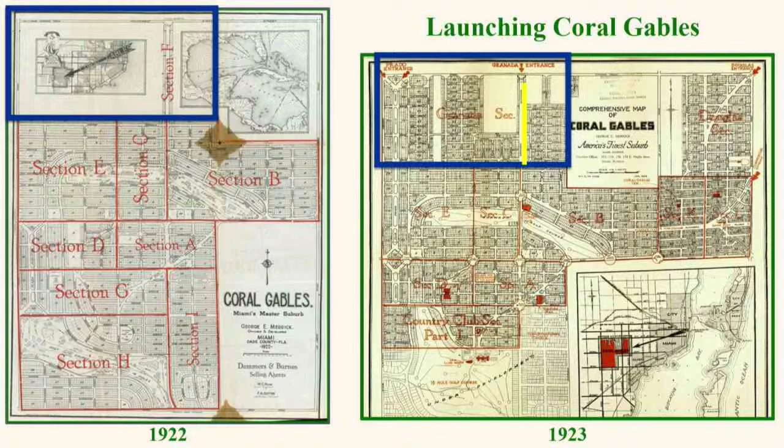In November 1923, Merrick launched the Granada section, publishing numerous ads and articles stating his intention for the area, like the one illustrated here. In accordance with the Garden City precepts that guided Merrick's development of Coral Gables, the new Granada section was intentionally platted with smaller lots on some streets for modest homes.

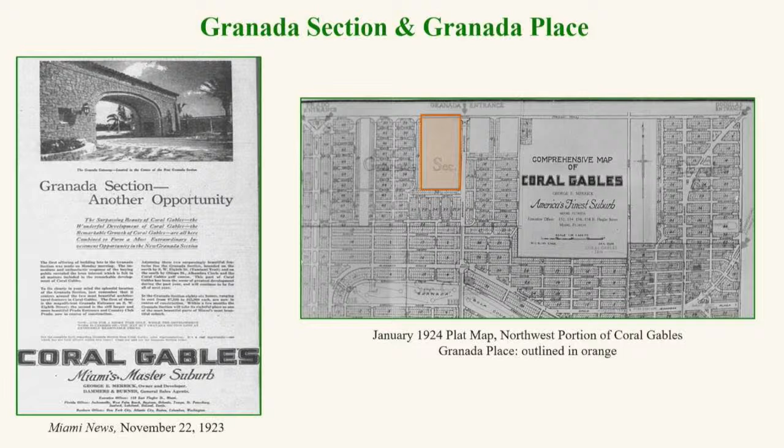Granada Place, seen here outlined in orange, was one of these sections. Merrick's plan for the smaller homes was that they were to be built with the same high-quality construction and Mediterranean Revival-style features as other structures that shaped the new city in the early 1920s.

Merrick platted the first section of Granada Place in January 1925. In the early 1920s, Merrick's team handled most of the building in Coral Gables. By the mid-1920s, the community's rapid expansion outpaced the capacity of Merrick's team, and they began recruiting leading architects, builders, and investors from across the country.

Permit documents indicate that Indiana-based teams were predominantly responsible for the early development of Granada Place. The building of homes, both large and modest, throughout the Granada section area happened at a rapid pace during the mid-1920s.

The Granada Place section followed this trend with construction of 17 homes on this small plat over a few months. Due to the 1926 hurricane and the economy, there was no further building in this area for almost two decades. The post-war homes that followed national trends were a distinct departure from the ornamented and picturesque Mediterranean Revival style that had dominated the city's landscape in the 1920s.

1116 Alberca Street retains its historic integrity and stands amongst these newer homes as a testament to Merrick's vision for a Mediterranean-inspired planned community.

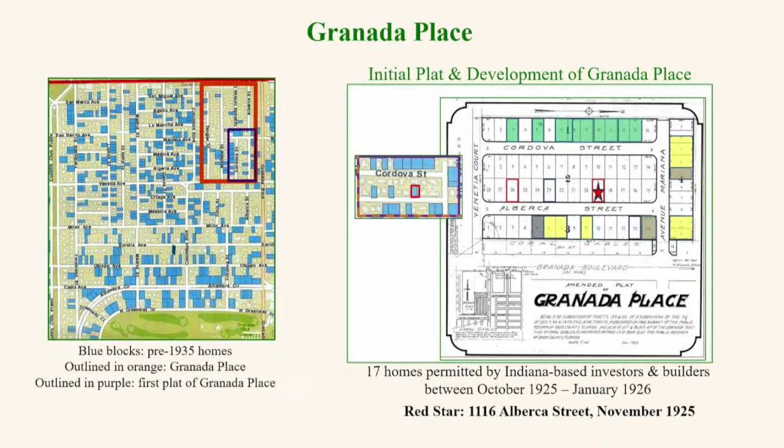What has become known as the Coral Gables Cottage started with Merrick's commissions in the Granada section to design finely detailed Mediterranean Revival-style homes on these smaller lots, to demonstrate that the moderately priced homes in Coral Gables would have the same quality of construction and aesthetic as the larger homes. 1116 Alberca Street is an example of one of these moderately priced homes.

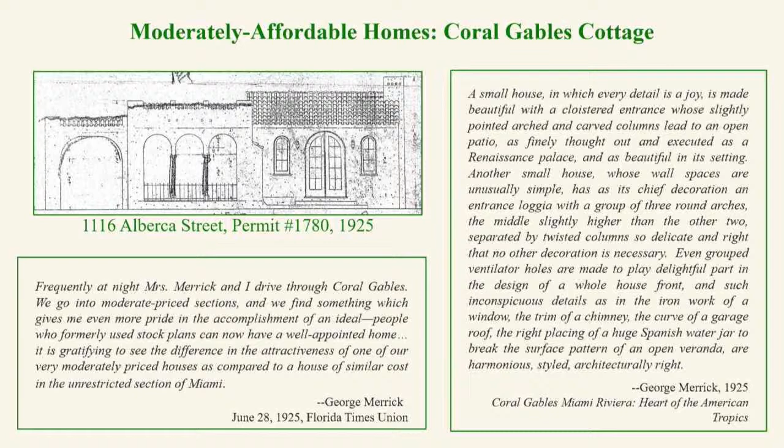The one-story, single-family residence at 1116 Alberca Street is designed in the Mediterranean Revival style. Some of its character-defining features include the textured stucco finish, a combination of roof types with pitched gable roof clad in barrel tile, and flat roof parapets with barrel tile copings. There is a front projecting and recessed bays of varying heights.

Across the facade is a series of arched openings. It also has a visually dominant chimney, and round vents are used as decorative accents on all facades. There is a porte-cochere, and the windows, originally casements, are recessed with projecting sills.

The residence at 1116 Alberca Street has had no additions. It retains its original massing and style. Primary alterations involve enclosing the front and rear screened porches for living space, and the change of window and door types. The original windows were casements. The current windows are fixed awning and casement in type.

The awning windows were installed in 1982, and most of the fixed and casement windows in 2019. The front facade has 3 distinct protruding, receding bays: the front entry, the original front porch, and the porte cochere. Each has a separate roof of varying heights. All of the openings on these bays are arched.

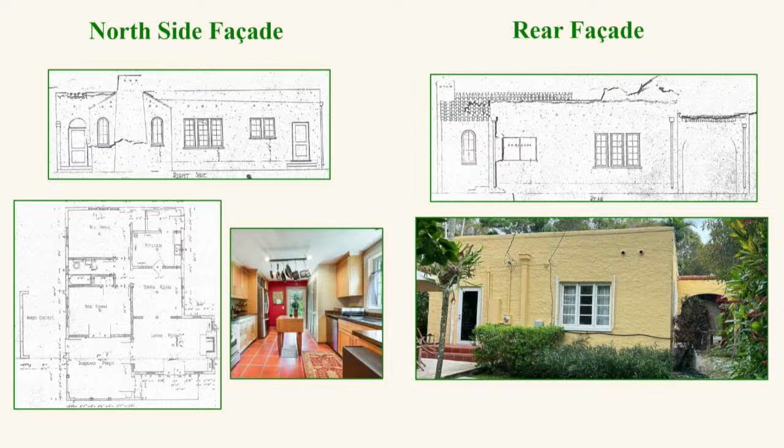In conclusion, the single-family residence at 1116 Alberca Street was permitted in November 1925. In accordance with Garden City precepts that guided Merrick's development of Coral Gables, the New Granada section was intentionally platted with smaller lots in some areas for modest homes built with the same high-quality construction and Mediterranean Revival-style features as other structures that shaped the new city in the early 1920s. They were built adjacent to and in harmony with other homes in Coral Gables. These homes are recognized as an important feature in the initial planning of Coral Gables.

While the home at 1116 Alberca Street has had some alterations over the past century, it still retains its historic integrity as a 1920s Mediterranean Revival-style moderate home in keeping with Merrick's vision. Hence, the property significantly contributes to the historic fabric of the city of Coral Gables and is part of a collection of quality buildings that serve as a visible reminder of the history and cultural heritage of the city. Staff recommends approval of the local historic designation based on its historical, cultural, and architectural significance.

Thank you, Elizabeth. Is the applicant or owner here and wish to speak? You don't have to. Would you like to? Okay.

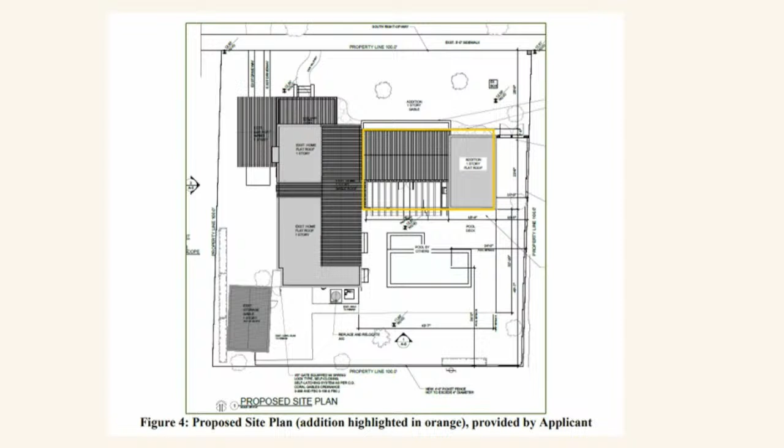Staff believes the existing 100 by 100 site condition allows the applicant to reconfigure the addition to meet the zoning setback requirement without having an adverse effect to the historic property, and recommends denial of the variance. Staff also recommends denial of the SCOA, and would like the applicant to work to reconfigure the addition to meet the zoning code requirements.

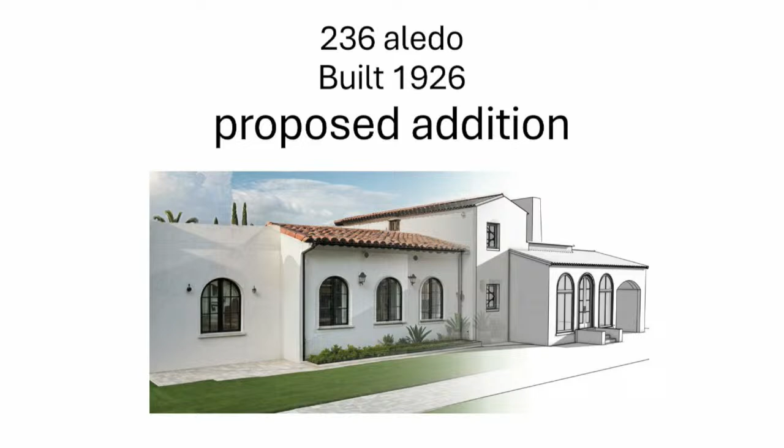The owner, we're more than happy to work with the historical board. They do appreciate the property very much so. And to give you a little background, we've been going back and forth with the board for almost 4 or 5 revisions to make sure that everything fits, keeping the structure itself in the best shape possible without creating any disturbance to the actual property or being overwhelming in any way.

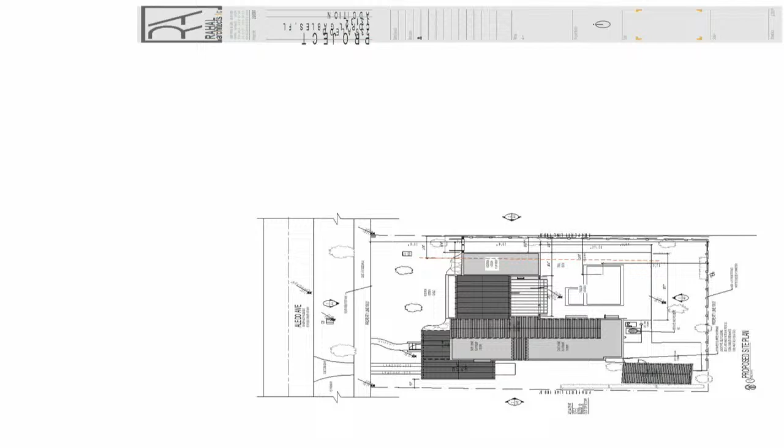With that said... is that you or CGTV? Okay, you can point with that thing. But the slides are twisted. Oh, that's a problem, CGTV, is that the presentation? There you go, that must be right. No, that's still sideways. I can do it through Zoom. Is that possible? Yeah. For some reason...

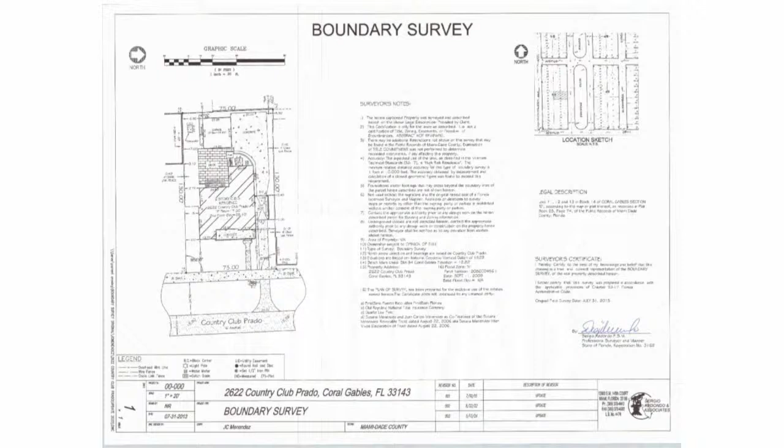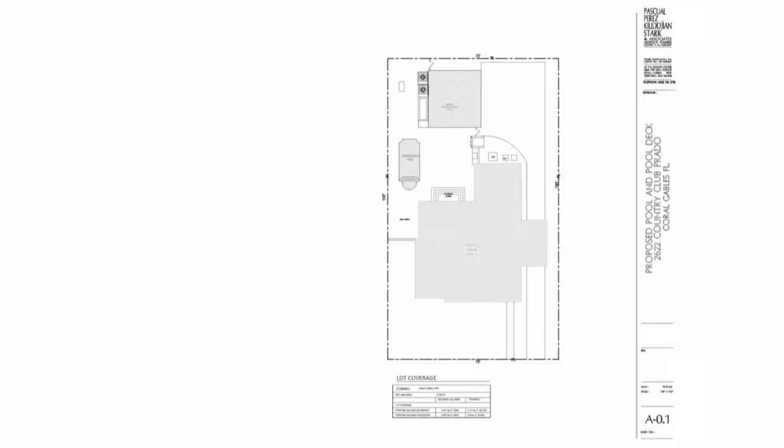Your packet may include a pergola and a bench that's being taken out. I think that's not going to be voted on - that was part of the report, it's shown in your drawings, but it's not. It was approved by the Board of Architects, but Historic had some comments, and the owner is not going to do it anyway. When they started pricing it out, and also I was never in favor of it to begin with, so I'm glad it's not in there. So my presentation does not show that.

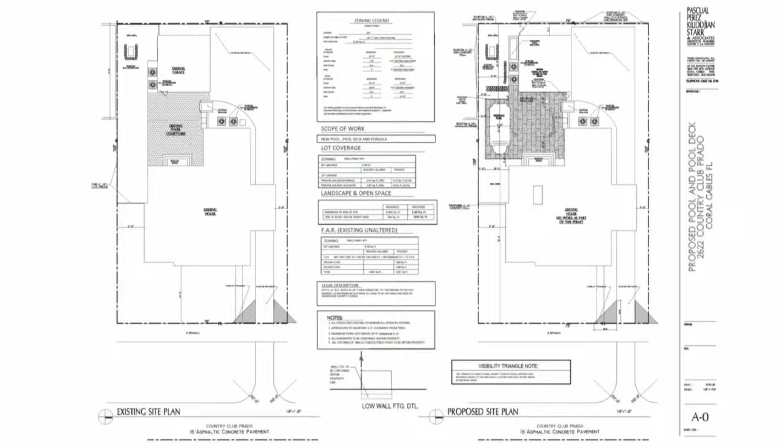It's kind of a reduced version of what you have. We're meeting all the other zoning requirements. The only thing is that setback. As you can see, the pool's already, I think, at about 9 feet or 10 feet more. So that's the existing floor plan.

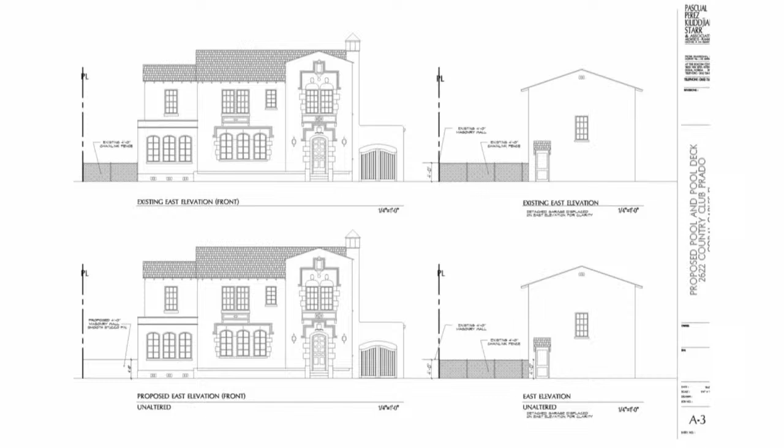What we want to try to do is keep the courtyard as a usable space. The changes to the front are actually from a chain link fence - I don't know how that got in. Well, it's at the corner, that's going to be a wall now. That's really the only change on the front.

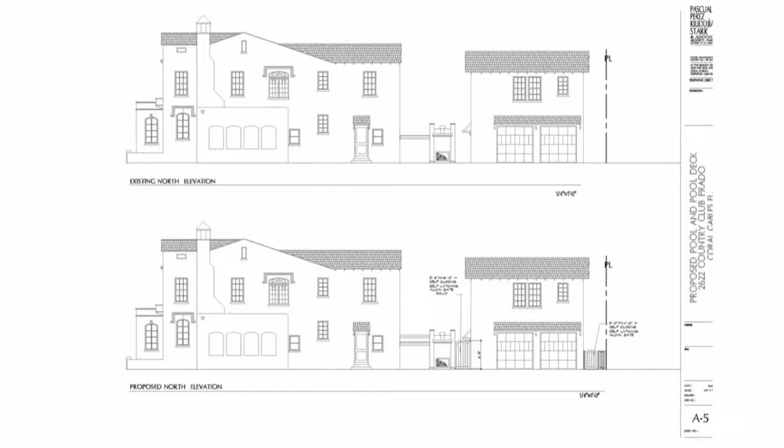This is the rear, again the same. The only change right now is going to be the wall versus the chain link fence, which I think is a positive change. On the side, you're going to get a gate between that barbecue structure and the garage, and similarly on the south elevation. So the only vertical elements here are really that wall and the gate.

I almost didn't come, but I missed you guys. So yeah, I don't know that I've done a variance in a while, so I don't know how.

The property originally had the lots to the rear going all the way to Red Road, and also the lots to its south on Country Club Prado. Neither of those lots changed the garage configuration - it was always in the rear, always side facing, with that driveway going all the way around. So we felt that it was an appropriate request.

Does that conclude your presentation? It does, I'm here to answer any questions. We're seeking your approval. We feel that it's a minimal intrusion, but again I haven't done a variance in a while, so I don't know the temperature of the variance. Any questions you may have, I'm happy to answer.

We have a couple of items. Any questions, Mr. Baños? The neighbor, any objections from him? No, there hasn't been any objections by anybody. But have you asked? I haven't personally asked, so I'm assuming that it got posted.

For reasons not having to do with the departments, this has been in the process for almost a year. The owner took his time. We got approval of the board. It sat around for a while, so if somebody was in opposition, they've had plenty of time to come forward. So it's not... Mr. Silva?

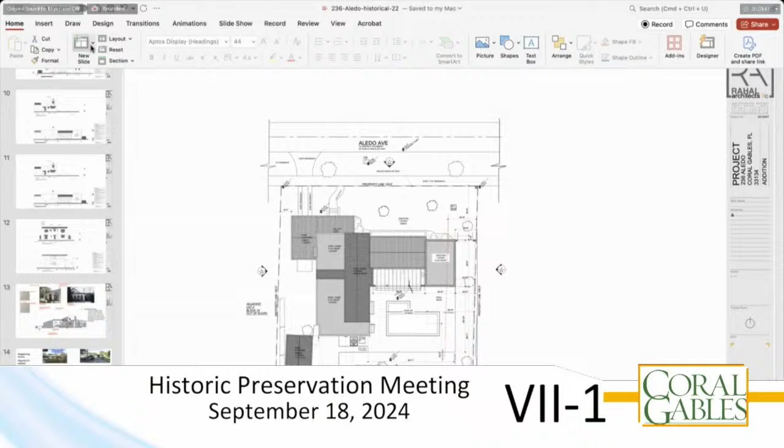To go back, I'm sorry again about that. For some reason, with other computers, it keeps on turning. So I guess the best way to do it is go through this presentation.

As described, we were proposing an addition. We've kept in mind that we want to keep it as minimal to the structure, or not invasive towards the existing structure as much as possible.

With that in mind, we've also discussed with historical to return back some of the key elements in the facade that was prior existing, such as the entrance, the large round top door that was reduced somewhere along the line. So our proposal is to bring the facade back to the way it had been designed originally.

In regards to the addition itself, this is the screen pool area that we're proposing to demolish with aluminum screen, which was not part of the original house anyway. But one of the key elements Anna was describing was this little bump out right here that we were trying to keep our addition as small as possible to fit into that location without making it wider.

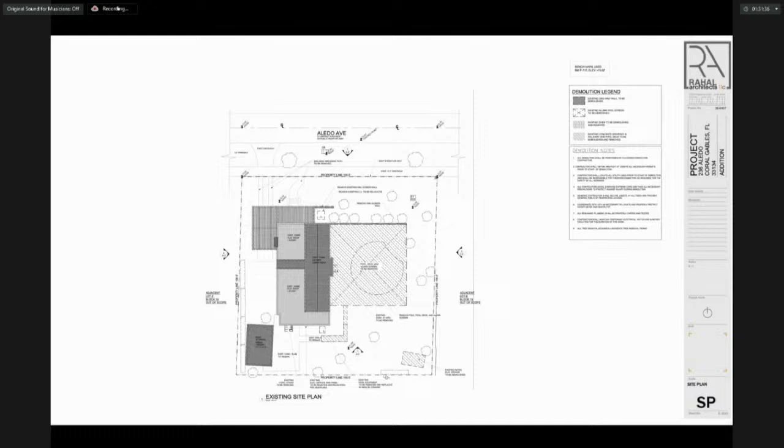Now with that, we have some challenges with the square footage that we need, and of course with the design with the Board of Architects to establish a good, decent design. And again, the flat roof, as described, arched.

Here are the elevations that will show the front a little bit more. This is the existing home as it is right now. Our proposed addition is to be on the left side.

We have brought down the height so it's not too imposing on the existing structure, so it doesn't overwhelm it itself. We recessed the addition itself - as you can see right here, this is where the addition is. We recessed the addition at least almost 1 foot 10 inches, so it will stand out as an addition, not as part of the original home.

As mentioned, our addition connects here, so we don't impose on that little bump out, keeping it as least invasive towards that little feature as much as we can.

Now, in regards to some of the setbacks, we did provide a 10-foot 7-inch setback on the front, which is a lot more than the minimum requirement of 5 feet.

Now, of course, there's also another code in Coral Gables, Section 2-101, which states we have to have 20% of the setbacks on the sides of the home relative to the lot width. Now the maximum side setback happens to be 20 feet, and the minimum side setback, because we have a 100-foot property, also ends up being 20 feet.

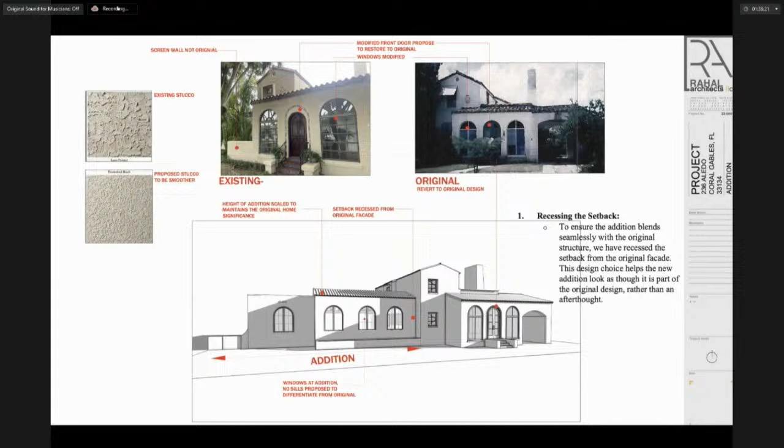Surrounding homes, as mentioned, this is a corner lot home. It's almost built to the property edge. And although a corner lot home, it's still built to the property edge.

This is another home that we saw that also, I don't believe they have a 15-foot setback. The point of this is just to show that it wouldn't stand out like a sore thumb. If anything, I think a 15-foot setback from one side on an interior lot would look a little bit awkward and empty.

I think that if there are any questions, please, I can go back and forth through the slides, and we'd be more than happy to answer them. Thank you, Mr. Rahal. Does anybody have any questions for the applicant?

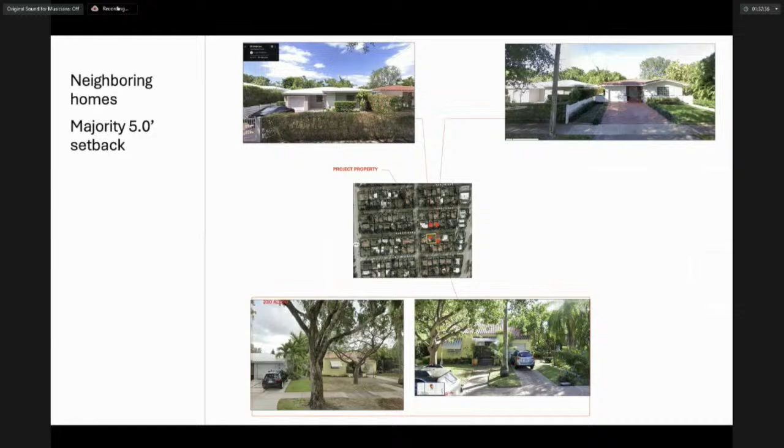Yes, Mr. Silva. I'll save my discussion for later, but I do have a technical question. Maybe it's for staff. So they're asking for a 4 foot 6 inch variance, right?

I'm looking at the survey, and on the front of the house, they've got an existing setback of about 5 foot 6 inches on one side. So if you take the 10 feet that they're proposing, that's 15.6, that's a 4 foot 6 inch setback. My question is, are the setbacks different for the rear garage? Because that is actually closer to the side property line.

That interpretation was identified by the zoning reviewer during the preliminary review, so those numbers are coming from that reviewer. We realized that too, the garage in the rear is closer, about a foot closer, so he identified it as the 14 foot 7 inches total.

Yeah, on that east side. I just want to make sure we're all straight, so we know we're approving or not approving. So essentially, that garage is sort of being disregarded then from this. Yeah, that's how the zoning reviewer interpreted it.

I know that they had met with him because there was some discussion about the 20% versus the 20 feet, and whether there was BOA approval for it, or whether that could count toward moving forward, but they recommended that they come here. Okay, if you check sheet SP, the site plan, you can see what Mr. Silva's talking about with the sides.

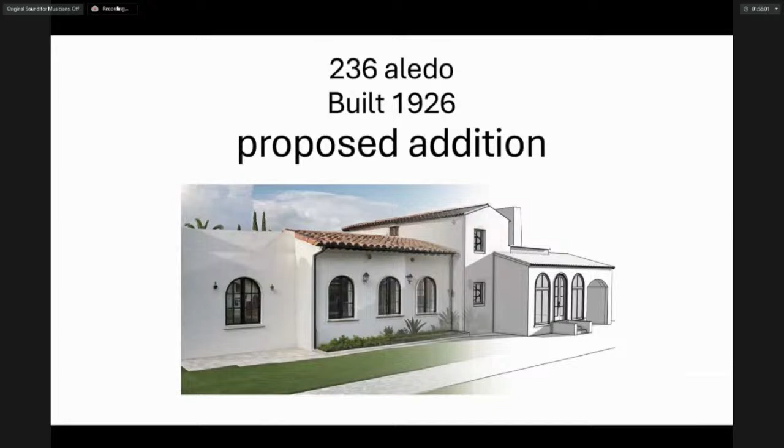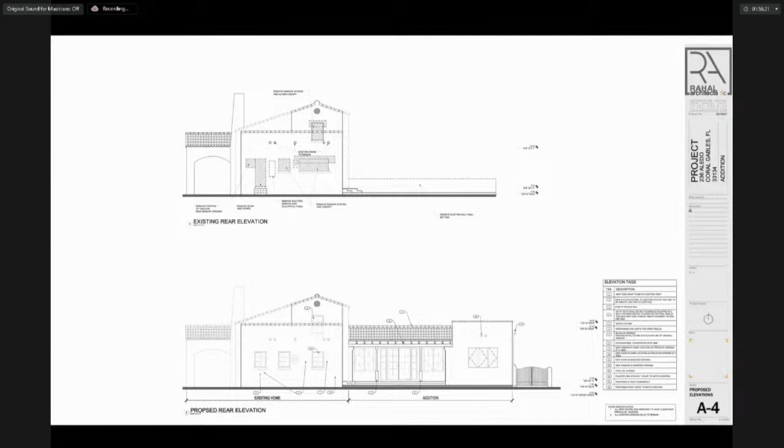Mr. Rahal, can you go to A3 please? Oh yeah. No, that'd be A4. A4 maybe? A2, okay, no, I'm looking at A3. Okay, A3 is - no, that's not it. Mr. Chairman, Mr. Silva, it's a little difficult to see on the presentation, but if you look at the package A3, I think he's drawn the existing masonry opening as dotted, and you can see the two. Exactly, it's hard to see, it's hard to see on the display and on the plans. All the existing are outlined. We were going to score - maintain the recess of the opening and then keep the modified opening within that space. Right, thank you Mr. Silva. Ms. Spain, I got it, I understand, all right. I don't know why A3 is not showing.

Thank you, Mr. Rahal. Any additional questions for staff or the architect?

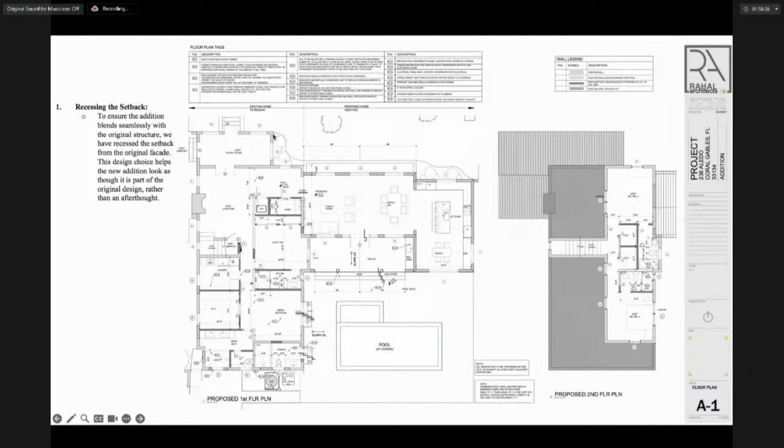Maybe I can go to the site plan so you can see it. So this is the front, you enter the home, this is an enclosed space. Our addition is way back, and we set it back twice. And this is where the side issue is.

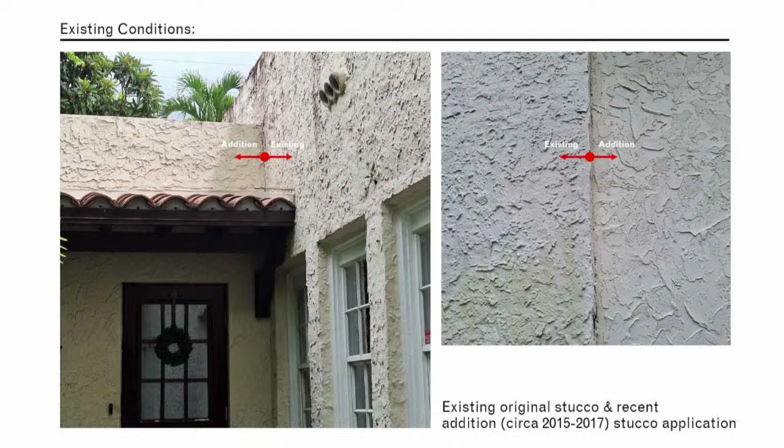This is the addition that we did 15 years ago—I'm sorry, in 2017, that we planned 15 years ago. This is the east-facing portion of the house, the kitchen side with the casement windows, by the way, that I'll address in the comments. This, unfortunately, is the second-story east-facing elevation as it exists and as it was originally planned, apparently. Our addition will cover this, bring it forward 12 feet, and then span across to the other side of the house. This is the window that was written up by staff.

Because this addition has taken so long to get this far, the client, working with the window contractor, called me and said he wants to get impact windows in the house. We're going to take the whole house window provision out of the application. We went back and took it out of the permit plan.

This window was the only one that remained. We are now proposing that we don't change this window opening or modify it. If it's included in our plan set, or if it goes into the window permit set that's already been applied for separately, it will be a casement window, size for size, in that opening, following staff's recommendation.

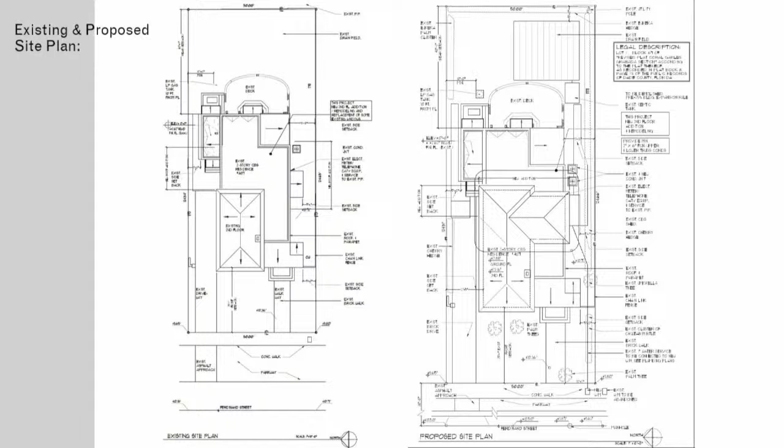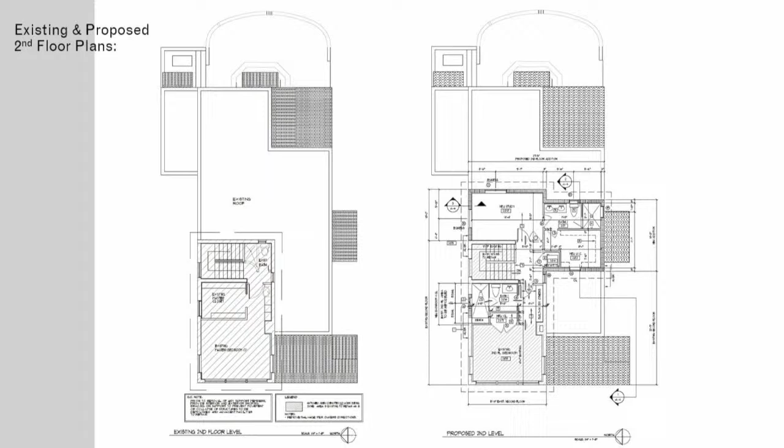All of this is on the east side of the stair. Our original intent had been to extend the addition all the way to the front and make a real decent master bedroom. So now, the only thing we've been able to do is add a study. They're going to be using the existing bedroom as a master, but they now have a better master bath and closet, and that's what this was about.

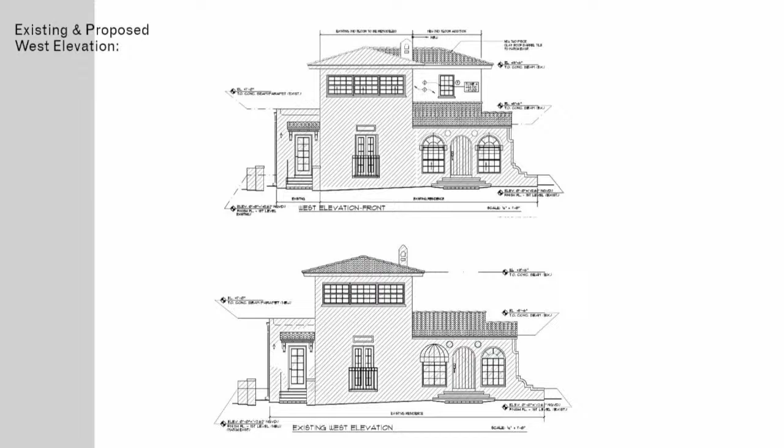This is the front elevation that is existing and proposed. This has been to the Board of Architects a couple of times because we showed them the grand scheme first. This is the modified scheme, and we had no comments really to speak of from the Board of Architects.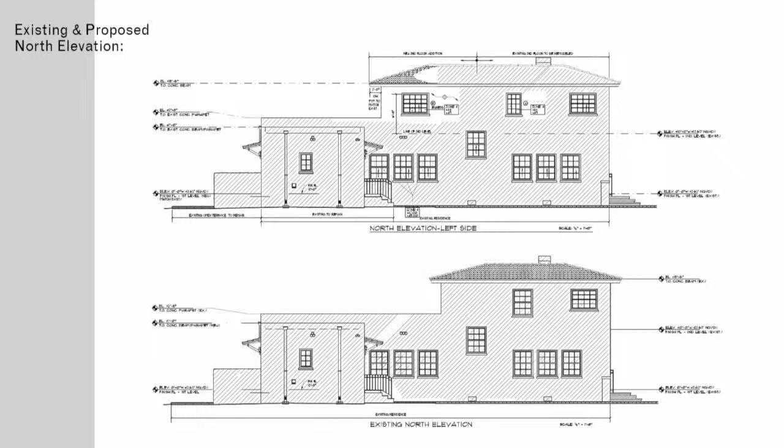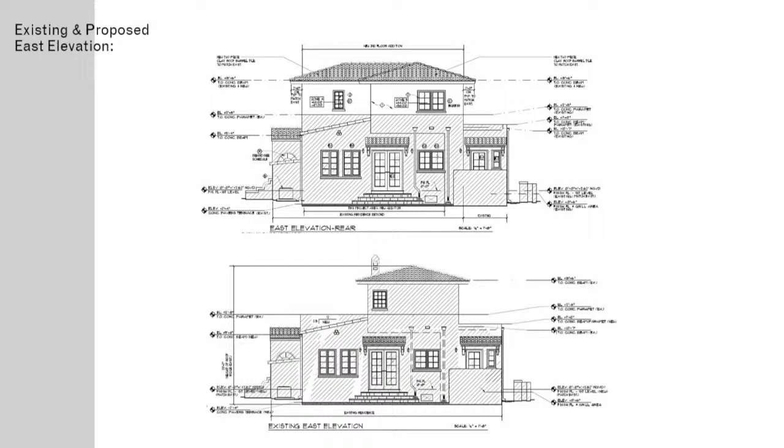This is the rear elevation that you really can't see from anywhere, but it's a lot better. Where there was one real narrow window, that's now a wall, and it will also be a casement window. I'll work with staff to see if we can use a single casement on that narrow window, which I believe is in the bathroom. But we'll address all the staff comments. Same thing on the south elevation: the new window shown there, on the only projection, will be casement.

And that's my story today.

If you'd like, I can address the points staff made, but I think I've covered those. You said you had no issues and were fine with the conditions. Okay, great. Any questions for staff or the architect?

Are there original drawings of the original house, in particular the eave? I feel like it's missing a trim or something happened there. It's been boxed out over time. And at the Board of Architects, they asked us to make the addition we're doing now match what's there.